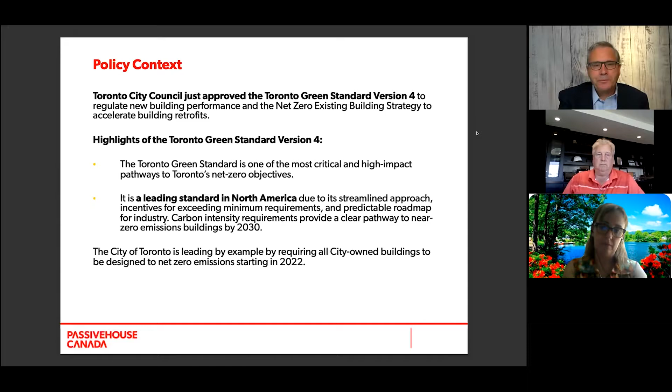So what caught my attention last week, maybe yours as well, were a number of headlines where the European Union said it would be imposing carbon tariffs on imports from nations that didn't have aggressive carbon neutral policies in place and weren't actively pursuing them. The same day the EU came out with its policy, the Federal government in the United States released its multi-trillion-dollar infrastructure plan, which also included the possibility of carbon tariffs on imports from countries without aggressive carbon neutral policies.

What does this mean for Canada? Well, quite frankly, if we don't get our act together and have those carbon neutral policies in place, the United States and EU could very likely use their policies to block imports of our products. Canada relying so much on exports to these nations puts us in a precarious position. So it's one of the reasons federal and provincial governments have been scrambling to beef up their carbon neutral policies, so the wealth of our nation, which depends on solid exports, won't be damaged if the EU and US get serious about carbon tariffs.

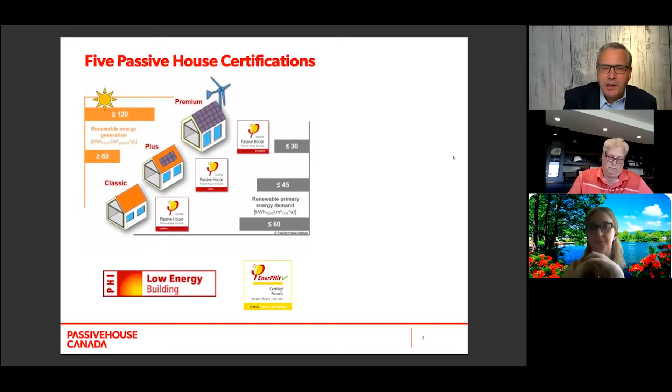The Passivhaus new build can create a building that uses about 90% less energy than a code-built building. If you go the EnerPHit route, we're looking at 75% less energy than the building used previously, all for a very small cost premium that's easily recouped.

Next slide. So wanted to show you some pictures of the sorts of things Passivhaus is up to these days. As Giovanni mentioned at the outset, Passivhaus is, I'll say, an unfortunate translation perhaps of the German Passivhaus, H-A-U-S, meaning building. Passivhaus is certainly more than houses. It's tall structures, it's community centers, it's single-family residences, it's MURBs. Basically, whatever built form you're looking for.

And it's one of the reasons that architects particularly like Passivhaus, is that it gives them the flexibility to design the look and the features that they think are required.

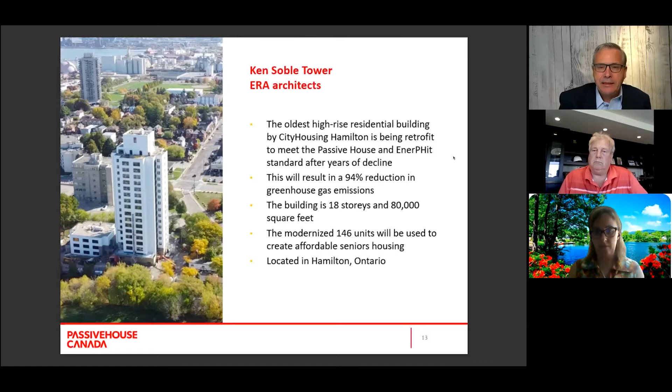So whether you're an architect, an engineer, a general contractor, a tradesperson, a government policy person, there's a level of work that will help ease the transformation into this new world that we're in right now.

I wanted to tell you about our Tower Retrofit Symposium, September 22nd and 23rd. It will be online, and we're bringing together folks from all across the country to talk about retrofitting, deep energy retrofits to towers. This is a little snippet of Ken Soble here, a tower from Hamilton. We're partnering with the Tower Renewal Project. It's estimated there are 10,000 towers across Canada that are in desperate need of renovation - mechanical, windows, facade - and now's the time to go deeper and do that deep energy retrofit.

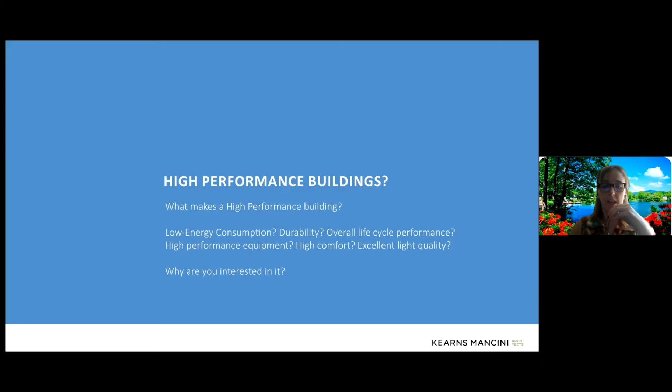I guess a lot of you are already working in the industry, and you hear the terms thrown around quite frequently: high performance buildings. What are they? I think Passivhaus can be confusing for people because the term house doesn't really explain itself too well. But just from a high performance perspective, what is it? It's low energy consumption. What does that mean for you - is it low energy consumption, durability, overall life cycle performance, excellent lighting, control, comfort? What is it that you would be interested in when you consider high performance buildings?

So just to tie that back - Passivhaus addresses the high performance building expectation by addressing all of what most people would think should be in a building. It covers health, comfort, environment, and significantly reduces costs. The interesting thing is Passivhaus was actually born out of the need to create healthy, comfortable buildings, and the environmental and energy savings are, by the way, a benefit of Passivhaus. In this COVID environment we're in, I think people are more concerned about health. So Passivhaus, because it addresses building physics and biophysics, provides a building that is healthy to live in.

Its particular focus with regards to reducing transmission for the likes of COVID is the fact that the ventilation system allows for clean air transmission. We're not mixing air, it's always fresh, clean, filtered air. And then we address relative humidity, which is obviously a reason why germs and bugs get transmitted normally in buildings.

So these are things we get out of a Passivhaus that go beyond other types of high performance buildings people may be used to, that have certificates and you're ticking off a checklist. This isn't a checklist. This is more a holistic, balanced approach to design.

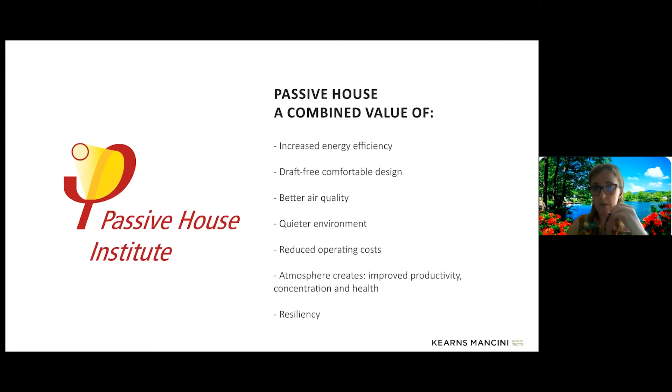This came about as a conversation with Giovanni, because I think in the industry there could be a lot of misconceptions. Even in Europe, even though it's used more often, there's still some misconceptions about what passive house is and isn't. Usually we talk about what is put in the building, but from speaking with Giovanni, it was more a case of how a passive house would affect designers and builders and whatnot. Initially I thought it was only like 3 or 4 remarkable things that are different, and then the list actually went on.

So you'll have to forgive me, this is over 3 slides. I'm not going to go through the has-nots, just assume the has-nots is the opposite of the is. You can read it as I speak, it's just quicker for everybody.

Passive House is an original Canadian idea, so it's not German. It can be any building. It's simple, low-tech, typical HVAC. It can have typical HVAC. It's high-quality design and construction. It's rigorous in design and rigorous in its construction. It's durable and low maintenance.

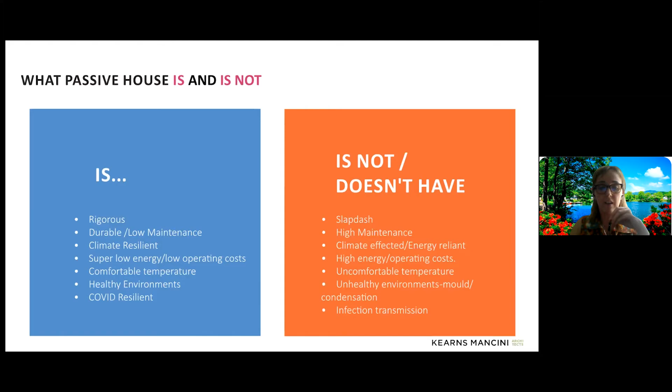It's climate resilient, has super low energy and operating costs, comfortable temperature all the time, a constant temperature usually set around 20 degrees. It has a healthy environment because of that constant temperature and constant fresh air. It is COVID resilient, and it is equitable, affordable, designed using science, installed by conscientious trades and contractors.

I wanted to say this because people might say, well, you're assuming the other buildings aren't conscientious. I think in the greater scheme of things, we find that often contractors aren't actually given the time or the fees to be able to be conscientious. So I think with passive house, when we start, there's the expectation and demand that in the design, the contractors be allowed to be conscientious in their addressing of the installations.

A design that is designed and built in collaboration, so a complete holistic design, and the owner, designer, and contractor take pride in it. I think often contractors and even designers lose their way in the design of projects because we're often forced into designing solutions that may not have been the best for the building, because of a budget or a design conflict that wasn't thought out at the beginning, so we end up having to design out in the not most practical or aesthetical way. So sometimes it loses at the end of the project, the pride is somewhat lost in the end result.

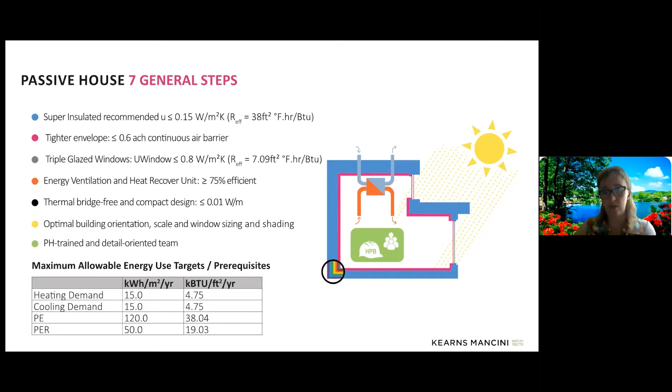Just to show differences between what we're used to - when we say there are differences, the material is the same. What we're using is the same materials that's in the Canadian market. It's just how it's positioned on the envelope, the layering, the position of the layers, and how well it's installed.

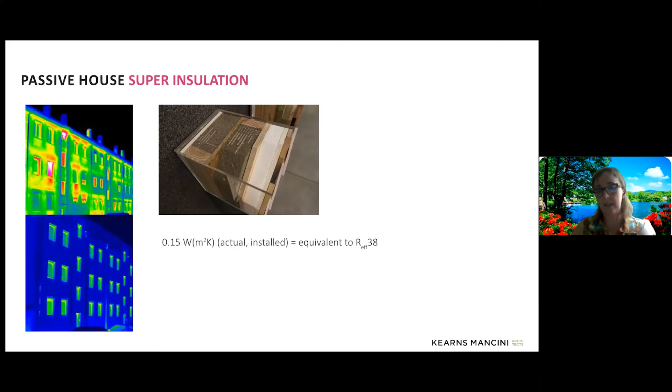Going back to the differences between standard construction and passive house construction and the trained team - how many of you put the lowest paid labor on site doing insulation and airtightness? Because for a passive house, these are the most important people on site, and typically we're putting the lowest paid trade to install these very important materials. So this is just the air tightness - the idea is that you install an air barrier that is completely continuous and has no gaps.

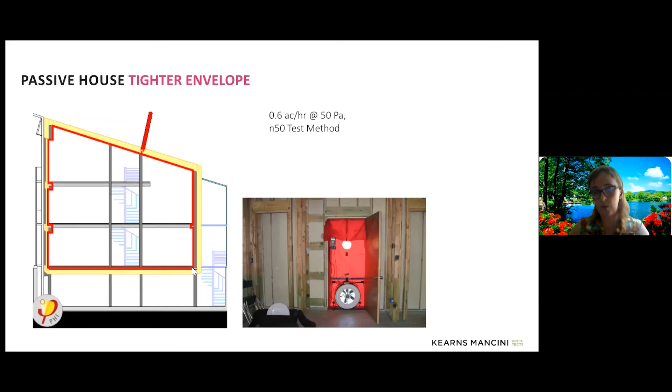And then the triple glaze units. This is just a cross section of a triple glaze unit and the installed value. What's important about a triple glaze window is that it itself is like a mini passive house. It's airtight, it's thermally broken, it has insulated values that are higher than anything typical in the Canadian market.

And what's most noticeable is when we say that no surface temperature will be less than 17 degrees, try standing beside your passive house windows when it's minus 25 outside and put your hand on the surface of the glass, and the surface of the glass will be at least 17 degrees.

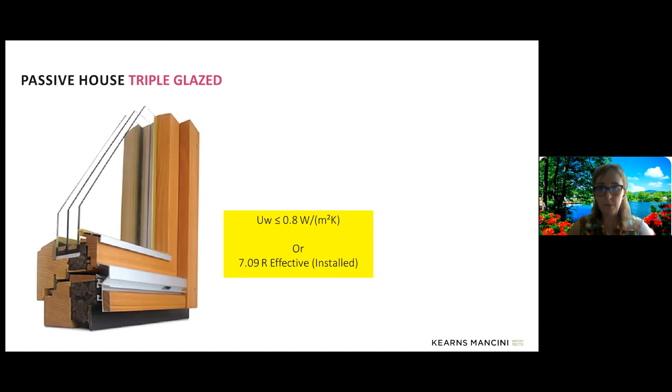And then this is the theory behind the mechanical ventilation heat recovery. So it is fresh air in, which could be cool or warm. There would be a summer bypass if the air coming in is too hot. The air going out is warmed or cooled already, but is dirty. So you get rid of all the toxins and you bring in fresh air and you warm the fresh air on the way in. And there's a whole bunch of things that it does by doing that.

So the warm, stale air from inside, the moisture, odors, allergens, VOC, CO2, and carbon monoxide are all removed from the air on the way into the building.

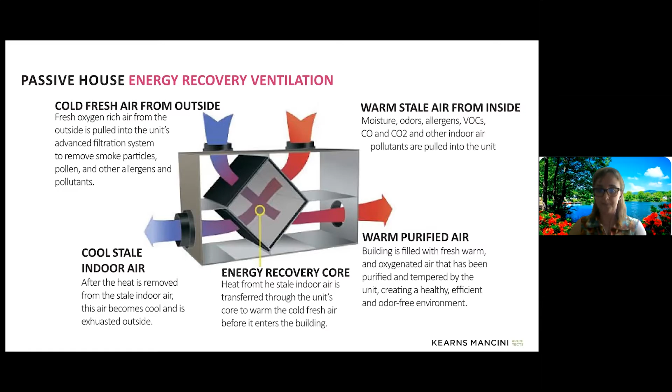And this is actually a certified component, commercial size energy recovery ventilation unit. Some of you may know these terms, heat recovery and energy recovery ventilation. The difference is that the energy recovery also addresses the energy within the humidity. So the humidity itself is hot, damp air. We're using that to recover energy, and it will have an enthalpy wheel inside of it as opposed to the heat recovery unit.

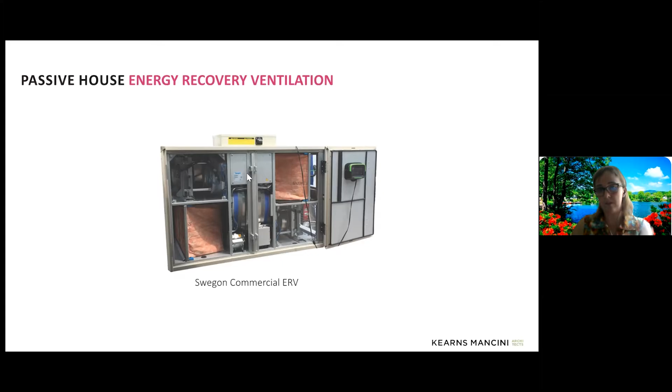And this is just an example of one of our thermal bridge free designs. Just because it was fairly complex, we went out of our way to make sure the insulation was completely continuous, but structure loves getting in the way.

So this was just to show that in this scenario, we have a bedroom on the interior, and this is structure that our core slab manufacturer couldn't make any smaller for us. So it was quite an intensive structure, and we needed to counteract the cold that was coming in from here into the building.

As you can see, the continuous insulation that we did, we wrapped around the beam and all the way around the core slab, the hollow core slab, actually helped us maintain that 17 degrees. And obviously in a bedroom, that's really, really important. So these are the level of details we go to.

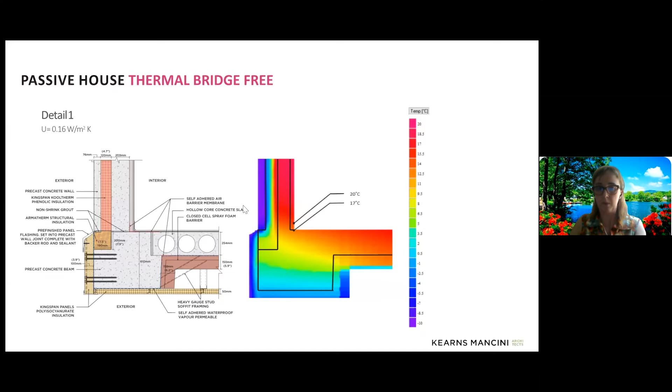And so as I said, the materials are not different. It's just how we're approaching them and how we're installing them. And the reasons why we're doing it is to maintain that health and comfort.

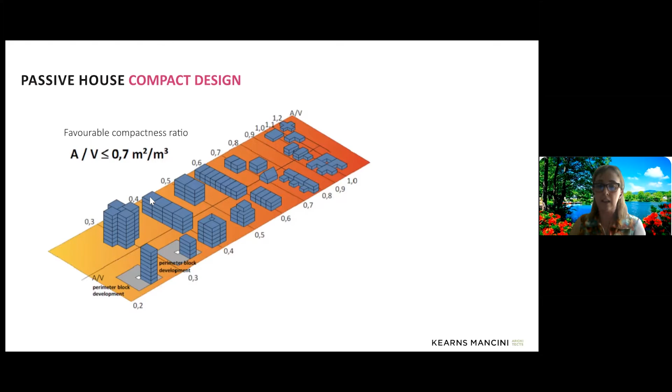This is ideal. Like I said, you don't often get a huge amount of control over this, especially in built-up areas, but these are ideals to start off with to achieve that energy balance that you're looking for. And so, if you can get the area to volume ratio of your building in the ideal size, then the design starts to get a lot easier. And then obviously orientation, we have ideal orientations.

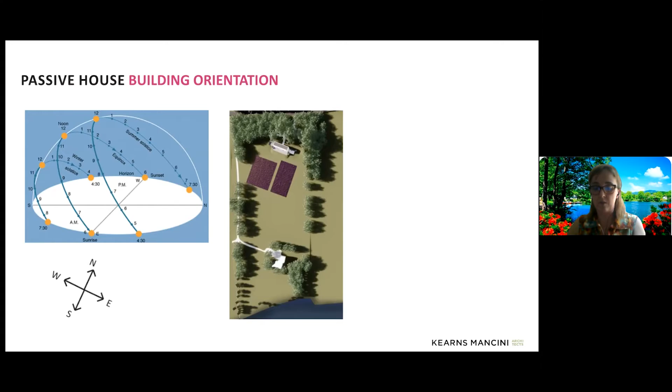East-west are most difficult to deal with because of the hot setting sun on the west. Depending on the scale and size of the building and the use of those rooms on those orientations, we can deal with those. I'm trying not to take too long.

And obviously, Chris already mentioned the training, so Passivhaus Canada can provide training. But our ideal scenario is a Passivhaus consultant and designer on the design team side and Passivhaus tradespeople on the construction side.

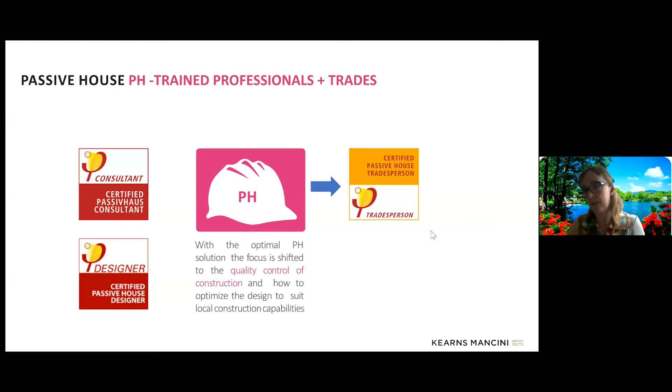And I like to say, how do we do this? How do we successfully build a Passivhaus? Really, it's the 3 C's: coordinate, control, and check. If we're all working with the goal to meet the Passivhaus rigorous requirements, to meet the 90% energy efficiency, to meet the health and comfort requirements, to meet the air test, to get a better air test than any other building in the province, in the country, we all have to work together.

And that's why it's coordinating, controlling, and checking constantly. I had come up with lots of C's, and suddenly I had 10 C's, and I just said, we'll stick with the 3: coordinate, control, check.

But our big thing is, how do we actually do this? Because often we like to work with our trades, but how do we get to work with our trades? So procurement is a big issue, and this is where we started to look at, for our client, to allow us to procure.

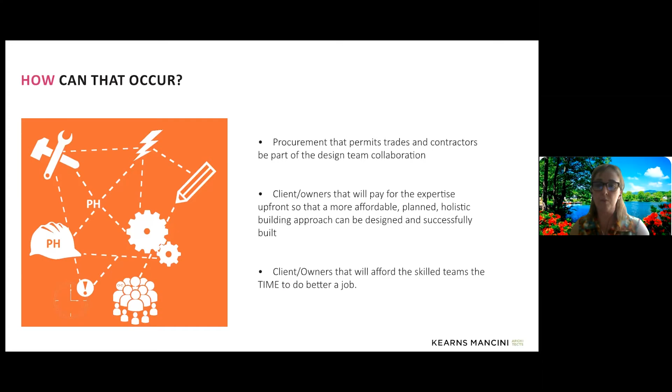Okay, so I'm not sure if Deborah's frozen. Maybe she doesn't have a continuous air barrier in her house. It's not 17 degrees. So based on the fact that she is frozen, we're going to kind of shift gears right now. And I don't know if she's going to come back on again, but from the contractor standpoint, I do know that we are interested in hearing from one of our own.

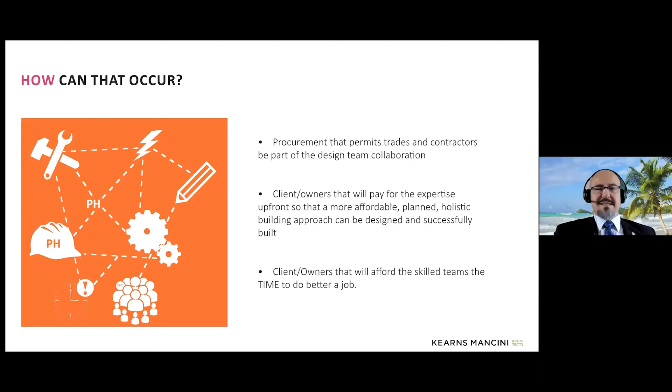And Henry, you've got extensive knowledge on passive house and building up to a passive house level. We'd love to hear your insight on the passive house, what it's like for you on your side of the fence. But I do want to note that Deborah did mention the need for allowing time and budget for contractors to be able to properly do the job. So, Henry, could you enlighten us a little bit on that aspect?

Yeah, sure. Thanks, Giovanni. Great to be here today. I just want to start off by saying, Chris also mentioned the government's input and being on board for a passive house. It was a great day yesterday.

As you know, Prime Minister Justin Trudeau is kind of on a bandwagon doing a bit of political stuff, but the announcements on Monday in Brampton on affordable housing and yesterday in Hamilton, yesterday's announcement was an energy initiative of $5 million geared toward projects that are using initiatives like Passive House. So it was a great day for us. Five projects in the greater Hamilton area are benefiting from that.

You also mentioned time and effort. We feel as a contractor - and I'll touch base on the conventional construction to Passive House - it's a bit more with construction management that we're using, almost to the point of an IPD, where it's essential that we get in with the owner and the client from the beginning, talk about the plus and minuses of being energy efficient, especially with Passive House, and being on board. I think that's essential, because some of the Passive House details lead to extensive details of insulation, a bit more time. Also doing the air tightness test, where you don't basically close up your building envelope until you've got your full insulated building ready for an air test.

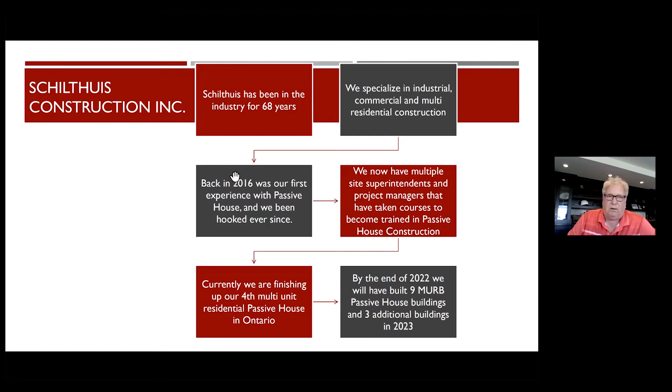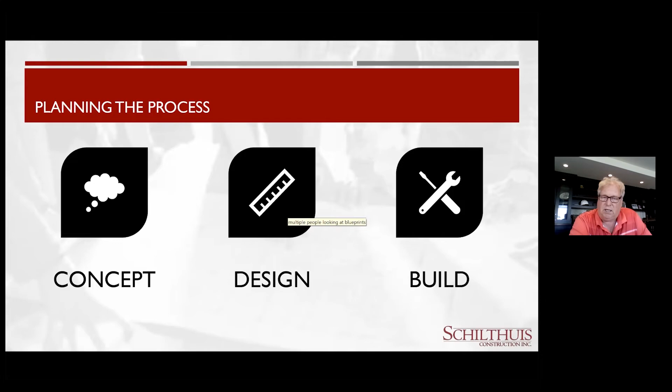In our typical planning, we look at concept and design and build, where the owner and designer will get together. The contractor is usually the last one on board through a tender process. We like to be in early, and the city of Hamilton had just recently, through procurement and city housing, done a couple of these.

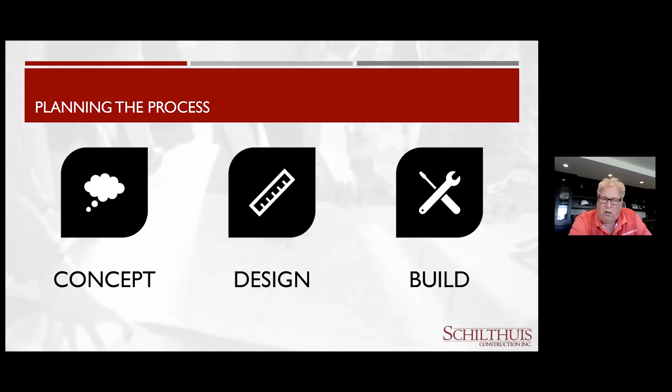Where they have ventured into construction management, based the procurement on a point system. It's a little bit different where we are involved. The last one we were awarded was last week with Kearns Mancini, dealing with what it means to be right from the beginning with the designers and with the client.

The planning process that we have there, you can see the cost, resiliency, and the final use. Because of the scale of the project where we have multiple units, especially for affordable housing, the cost that we multiply for each of these units is important.

You're building a building with 400 to 500 square foot units, but you have kitchens and washrooms and everything in that scale. So we really have to be aware of cost effectiveness on a multi-unit residential building. Resiliency, we want to make sure these buildings last longer than most buildings, and the Passivhaus standards really give credence to quality design and details, but also products.

And the final use, the Passivhaus model, in many ways unlike a single family home, you have tenants that have different needs for heating and cooling, and we just want to make sure that we keep the tenants, the end user, in mind in all our design.

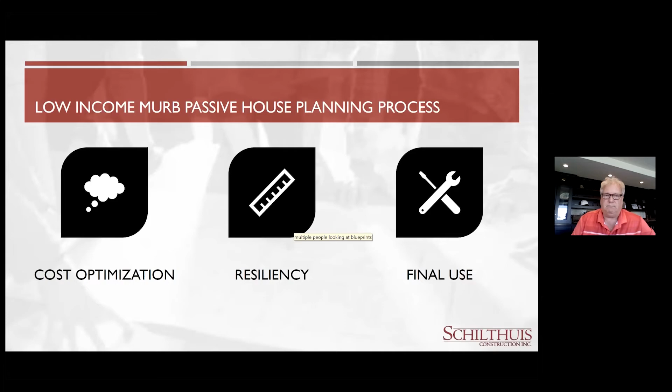So here we have Passivhaus versus conventional that we usually see, a lot more attention to details. The other one, sequencing. It's important that you have the tradespeople, but also your site super and project manager. The sequencing is very important, as you'll see in a couple of slides that I'm going to show.

The materials, as Deborah mentioned, some of the Passivhaus windows were basically European, and that presented challenges, especially with COVID. Part of that was getting the windows shipped over, delays on that. And we are seeing more manufacturers leaning toward more energy efficient triple glazed windows, and we have some manufacturers now in Canada getting those materials.

But same with precision, as Deborah alluded to, you need quality trained people. So we do a training program for all the trades on site, not only our own personnel, but also for the trades engaged as subcontractors, just to make sure they all realize the importance of the work they're doing and how important every detail is.

And cost, I'll refer to cost in one of my last slides. There is a bit of cost implication, but overall it's not as great as we think. It could be anywhere from 4 to 10%. The analysis we did on our first project was a 4% cost, but that is more than made up in energy efficiency in the building itself.

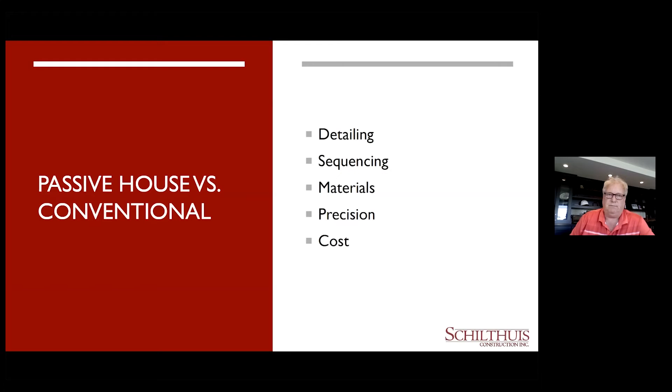So this is one of our typical details. We did a raft slab construction here, where we have the perminator, which is kind of the vapor barrier underneath the footings. These are piers for the main structural components. Once we pour the actual slab, you'll see that we tape all the perminator back onto the concrete. We insulate under the footings and up the sides. And once those details are there, it's care in making sure everything is sealed properly.

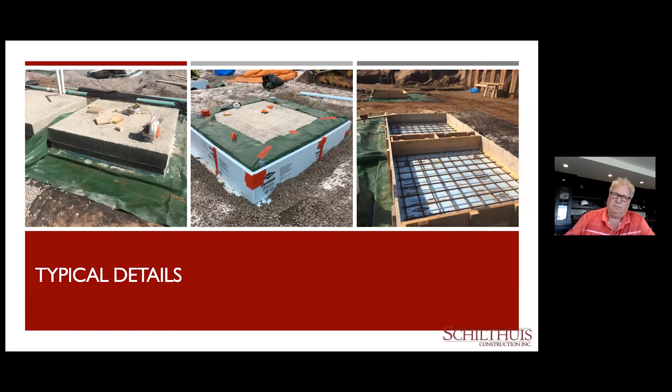Go back one, Josie. There you see the actual raft slab. It's a major undertaking to make sure that the perminator is there. Some of the initial details, and that's where changes are made as we construct this.

It called for the perminator to be on top of the insulation. But knowing the process, you see there we have a rebar mat in there, and typically when you use a vapor barrier, there is a lot of traffic on it. We're worried about puncture, so we use the concept that we use in arena retrofits too, where you put the vapor barrier in some cases between the two layers of insulation to protect it, and that way we could install the rebar mat on top of it.

And you see us there pouring the raft slab. The case for the raft slab in this project was we had contaminated groundwater, we could not go any deeper. Even so, it just meant economically we didn't need a full basement, so we ended up with a raft slab for this project.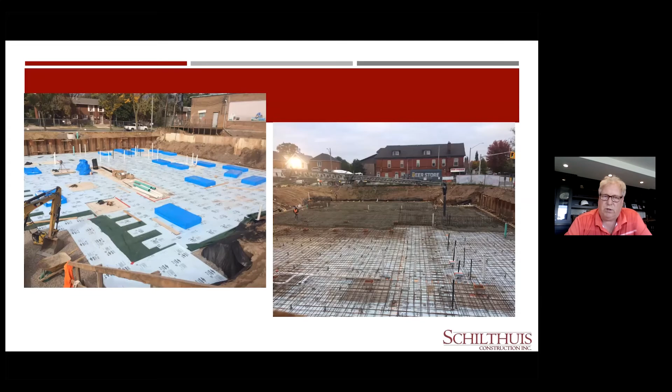So exterior insulation is a big factor on all Passivhaus. Some of the first projects we did, we went from a spray foam insulation to this one, which was an exterior mineral wool. Basically, in a lot of these projects, we are finding with the thermal breaks and everything else, using the 6-inch, or sometimes depending on which method we're using, 5, 6, or 7, we are having the exterior mineral wool on the exterior.

After you see the building there, it's blue skinned, that's a vapor barrier. All the insulation is on the exterior of the building, none in the actual walls. In this case, the walls on this one were steel stud on the interior, so no insulation interferes with electrical or plumbing or anything else. And we use green girt clips, which are fiberglass angles, to hold the insulation in place.

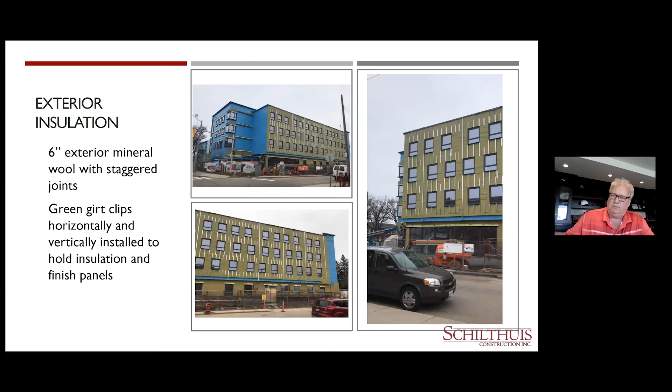As with that too, you've seen this one here was a total wood construction. We find that the exterior assembly of wood is a lot better on thermal than structural steel studs. And we use the zip panels here as a vapor barrier.

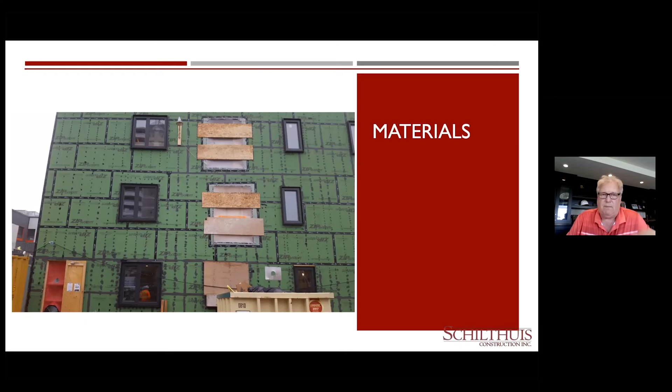Everything's sealed. We'll get into a window detail, but once we have the whole building, you see also the doorway on your bottom left, there's that tarp. We're doing the air test here during this photo, making sure the whole building is sealed. Part of the challenge for us as contractors is we did not start with any of the cladding here until the roof is on and everything is sealed. That's why the time is important, to allow the builder to achieve this point in construction. It takes a bit longer, but overall the building is a lot better.

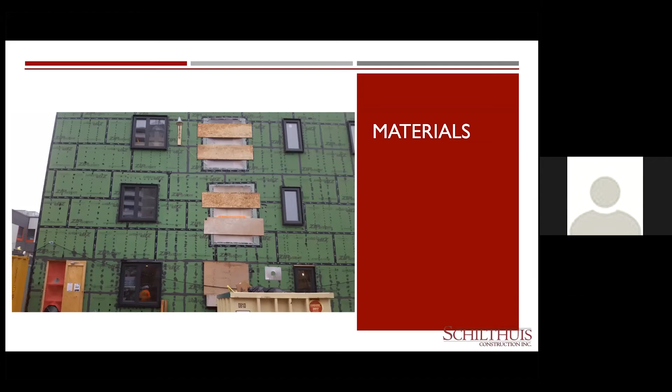On this one too, the earlier one we've seen the green girts and the fiberglass. This one where it was all wood is called the long screw method. Engineering made sure that this would hold our Hardie board and siding for the building. Some of this, of course, was the challenge of putting all this strapping on, labor intensive. But at the end of the day, it's making sure that all your insulation and vapor barrier, doing the long screw method, was self-sealing as it went through the vapor barrier back into the wood frame construction.

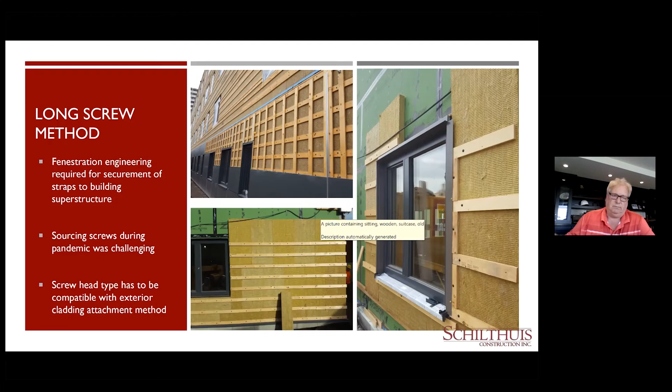Here we see some of the actual window and the window bucks. We developed different standards for putting the windows in. We came up with, after our third job, looking at a plywood window buck, because you want that window also to be thermally protected. Make sure the insulation is part of that barrier.

So we pre-painted with a liquid air barrier, a Viscon. You could also tape it or blue skin it in different ways. We just felt that the actual air barrier we used here was compatible with the tapes we use for the outside of the window and for sealing the inside. That's one of the things, you make sure your materials are compatible, but also availability. There are more and more products going out there, but still, as contractors, you know the challenge of supply with a lot of materials. We had to be wary of what we were using.

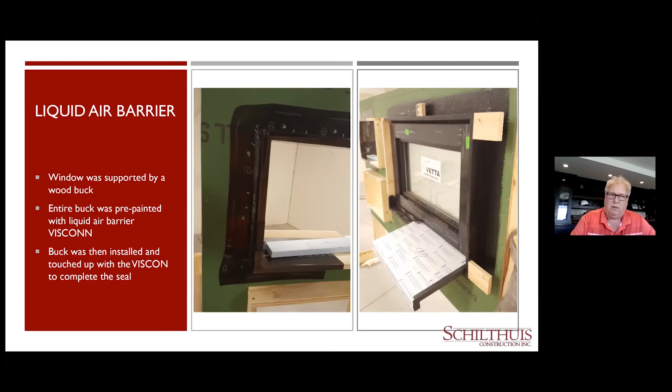So one of the first projects that we used, there was a retrofit, total cost was over 10 million. And Posterity Group did a bit of analysis on that.

There were increased costs because of more insulation on the roof. Typically it was an R25, we went to an R56 on the roof. Same with the walls above grade, we went to an R38 on the exterior. The walls below grade, we clad to an R43 from an R10. And windows, same thing: thermal performance, air sealing, and the install of the windows is very important, but also the windows themselves. Overall on this building, it was only 4% higher than conventional.

Some of the costs here is not maybe in the time frame, it would be about 3 months longer for this building than a typical one, but that's basically because of the time taken for everything to proceed at a proper level, and all the inspections during the different phases of our details too.

Part of that is also the HVAC. It's not here, but part of the cost was the HVAC came in lower on the capital cost, and also the actual long range benefit is that it will be beneficial for less energy use as we proceed with the building.

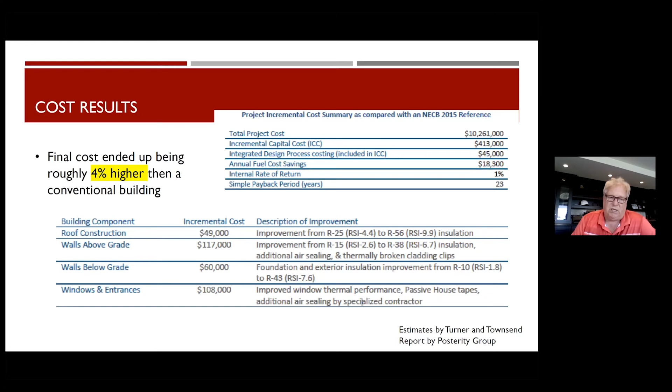I think part of that is working as a team. We found out that a collaborative approach with the clients, architects and designers working together, like I mentioned earlier, it's almost like an IPD. I think that's very important, understanding the big picture of what you're doing with a passive house project, and sub-trade involvement, making sure that the trades are on board. It's a little different than a typical job.

We make them quite aware in their tendering process, but taking care. It's amazing how many of the trades and our own personnel, once you're on board with a passive house, how proud -- we're always as contractors proud of the buildings we do. But just the fact here too that we are doing air testing, making sure and hearing the tenants' reports after about the building itself, and the comfort level and the quality, I think is really important.

So in summary, passive house is all about learning and growing. I think we're still an emerging market on the Canadian side, and as I pointed out with the tower retrofit that Chris mentioned and some other office areas, more and more contractors and designers are getting on board with energy efficiency, especially in passive house, changing and adapting details. From our past experience, sometimes things work well, other times they don't, but it's about getting back to everyone as a team and doing an analysis after the building is built.